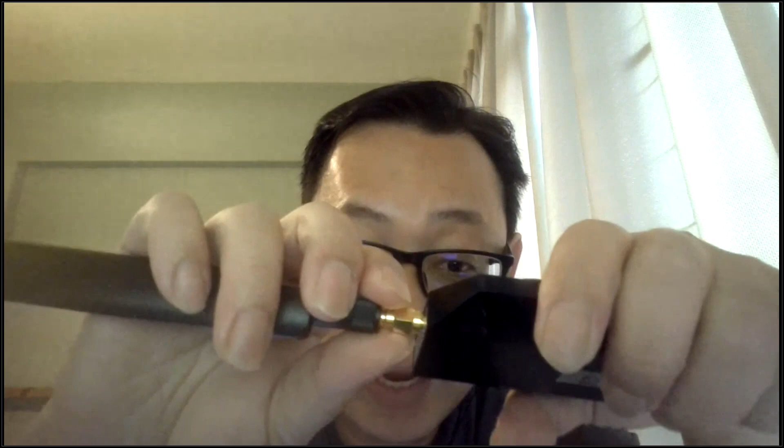This is the external antenna that comes with it. This connection is an SMA connection, so in case you have any other antenna that you prefer, also with SMA connectors, you can use your own preferred antenna and connect to the Epiq scanner to do the scanning.

From here you can see this is the USB, the Type-C USB connection. You can connect this with the tablet running the iBwave mobile software app via this USB cable. This scanner is actually powered on using this USB cable as well, and of course, this cable must allow data connection transfer so it can do the power up and data transfer at the same time.

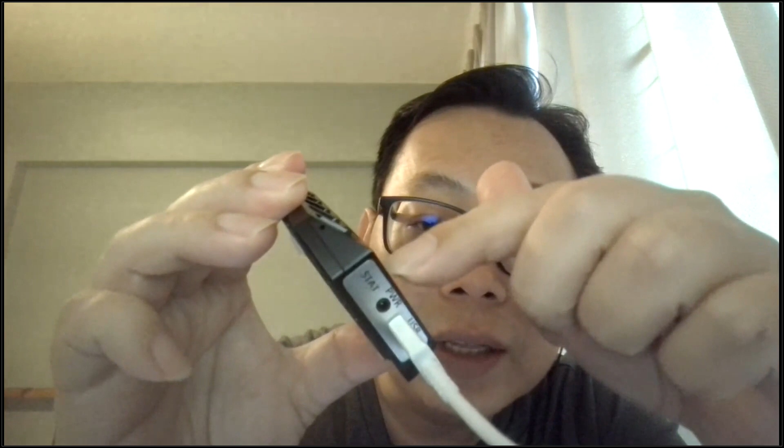So after it's powered on, you will see there's a blinking light, which means the hardware is ready to go and use.

So after this, I will move toward the demo, the live demo session.

So in order to connect to the Epiq scanner, we need to open or launch the internet browser. In the internet browser, you can use Chrome or Edge, and then type in this IP address to access the user interface for the Epiq PRiSM Scanner.

Just for your information, while connecting to this Epiq scanner, the tablet or mobile device must be in the so-called airplane mode. This is to allow the full feature Epiq scanner to fully capture the RF signal scanning.

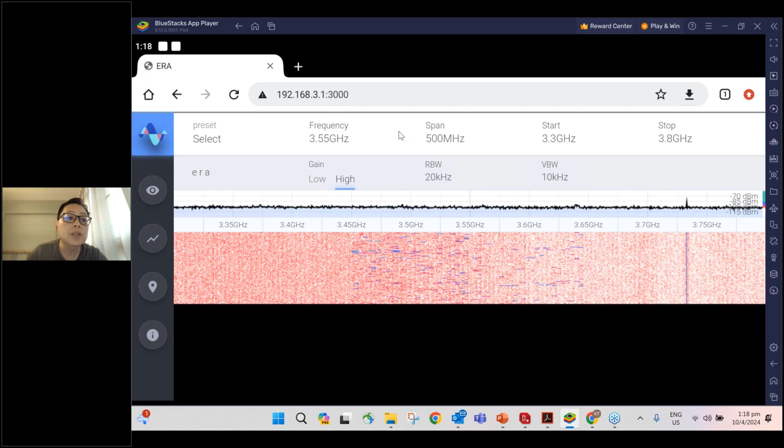So first, we go to the spectrum analyzer feature. From the screen you see right now, this is the spectrum analyzer, and you will see there are four main features for the spectrum analyzer.

You can change the resolution bandwidth, or you want to change the video bandwidth - you can just click on it. For example, I just want to narrow down the VBW, so it will help you smooth out the noise variation on the trace.

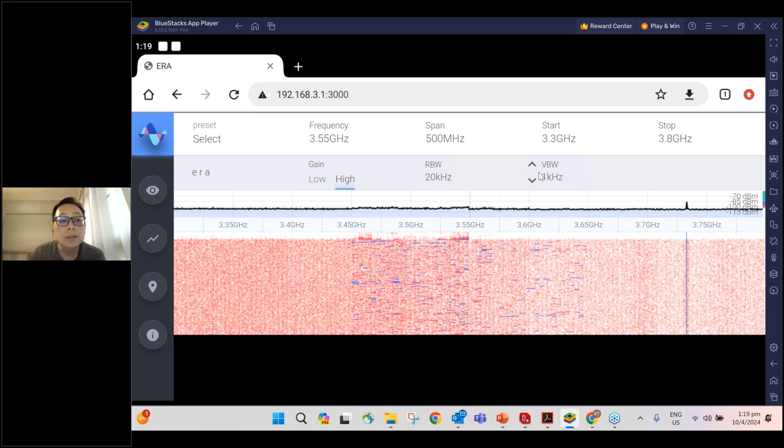So when you see this, there's a button on the left hand side. The reference signal we currently refer to is -70. If you want to change it, you can change accordingly. For example, -75, it will display on the screen.

On the right hand side, the separation for each division is 15 dB. This refers to the dB per division. If you want more narrow separation, you can change it here.

The second thing will be the trace in the spectrum analyzer. It's important to identify the minimum trace and the maximum trace. You can enable either minimum or maximum, or enable both. For the maximum trace, you turn it on to trace the strongest signals, or you use the minimum trace to check if there is any constant signal hidden within the bursty signals. I'll just leave it as is for demo purposes.

Here is a marker, so the user can double click on this spike. It will show you the frequency and the power in between, and you can add it as a marker, which will save in this marker session. All these features help the user scan the surroundings and identify any potential interference. Lastly, there's an interface here you can click to go to the PCI scanner.

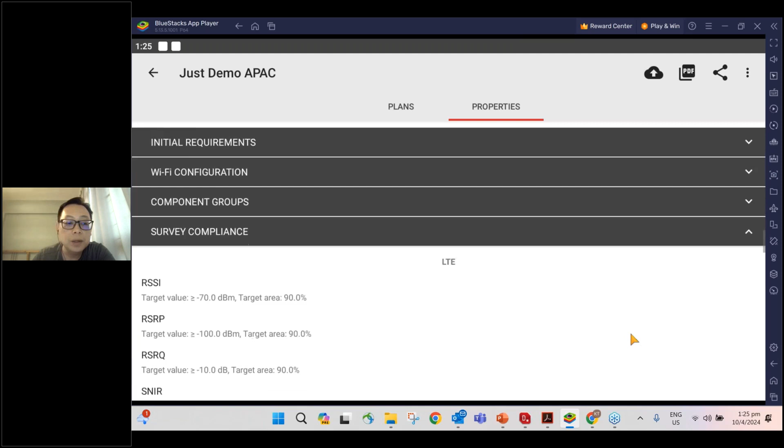So here is LTE. You also can set what are the target values that you want to change. So you can change, okay, I want for this, I want to achieve minus 90, 95% of the area. So you can always change the KPI for the project.

So we go back to the plan. Plan is actually the floor plan that we refer to. This is the term referred in iBwave.

You can also use this plus button here to import your outdoor map or the indoor map. If you have an outdoor map pre-saved in your device, you can choose from the folders. If not, you can straight away turn on the Bing Map feature to capture from the Bing Map.

And for the indoor floor plan, it's the same. For select picture, that means you have a pre-saved floor plan, so you can select it from the folder you saved in the device.

Or in some cases you do not have the floor plan, so you go to the site. For example, in a shopping mall, you can always go to the shopping mall directory or the fire exit staircase, where usually they will have the photos. So you can use this take photo feature to turn on your camera and take a photo to use as a floor plan.

In the worst case, if you go to a very old building that doesn't have such things, you can use our built-in create plan tool to draw your own floor plan.

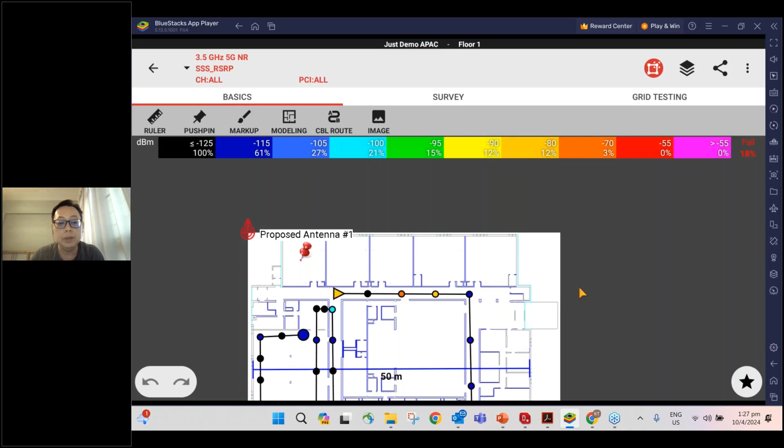All right, let me go back and double check the scanning. I will stop here for a while. Go back — so it's still scanning, but that's okay. We have some information that we can reuse for the demo.

In the iBwave mobile survey app, there are three main features. The first one, the basic, is actually the site survey feature built for the user to take notes on all the information they record during the site survey.

They can survey the cable routing or the proposed antenna location using a push pin placed where they think an antenna can be installed. After pressing the push pin, the user can record using the camera, take a picture or take a video to see the location, and also add remarks, like, okay, this is a proposed panel antenna location.

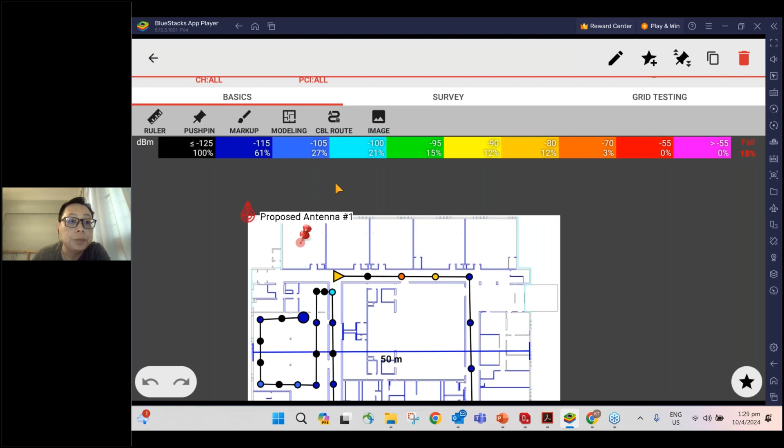Of course, you also can do some modeling. In case the floor plan is not updated, you can update it by drawing the wall or the corridors.

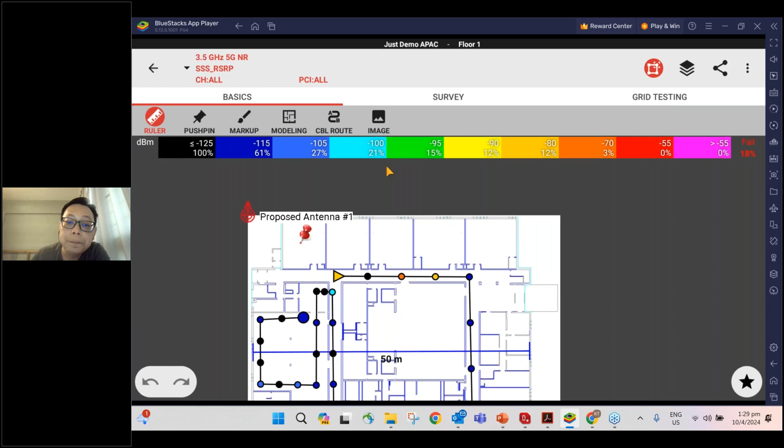The ruler is the one you can use when you go to site, if you want to measure the actual distance. The third one, grid testing, is mainly built for P25. I will not go through the detail here because we are unable to demo it. If you need any P25 demo, a private demo, please kindly contact us and we will arrange accordingly.

So the most important here is the mobile survey features — these are the features that we link with our Epiq scanner. These are the samples that I did for 5G.

So you can see this — these are the samples, let me see — okay, floor 1 and floor 2. These are the samples that I collected for 5G. You can see this is a 3.5 gigahertz 5G NR walk test that I collected.

When we create a new site, the walk test, you can choose either 5G, LTE, or P25 — you can do both simultaneously together in one walk. For LTE, for example, we want to test 1800 just now.

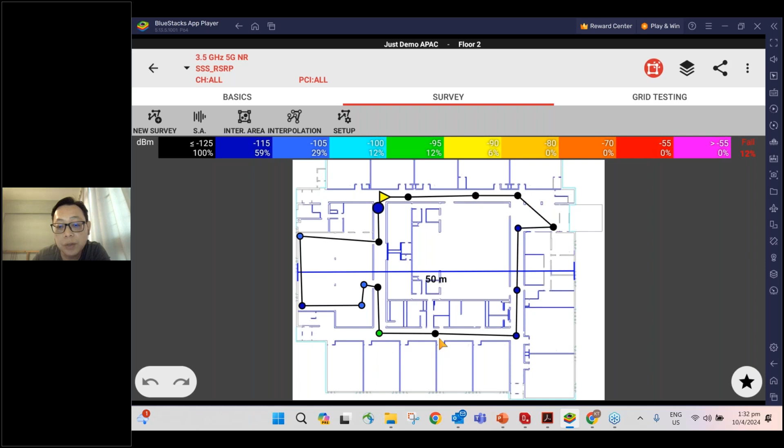So here are the samples of stop-and-go. You can see it's starting from this triangle point. When I walk to the next point, I just place a marker. When I walk continuously, unevenly, I place another marker, and so on — you can see that the points in between are not distributed evenly.

So this is the example of stop-and-go, and this is the sample of 5G 3.5 gigahertz using continuous mode — you can see in between they are divided at an evenly distant interval.

So it saves us a lot of time to reduce, to keep looking at the floor plan.

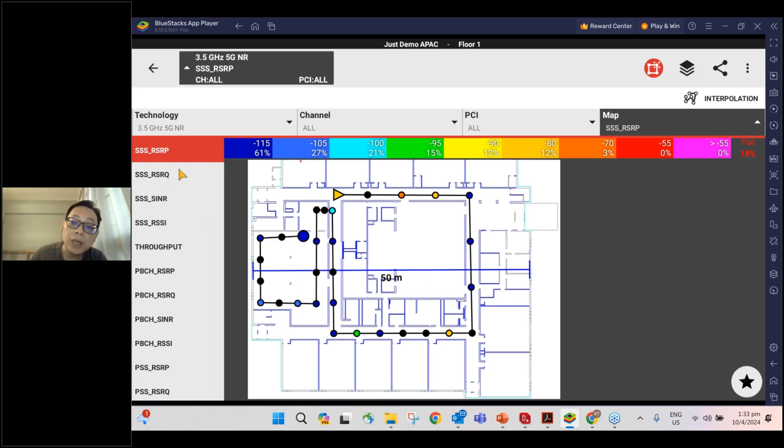Okay, so when you click on here, for 3.5G you can see what channels we scan. You can scan multiple channels at the same time, and the PCI we capture. Then the output map, the KPI we can capture for 5G currently is only the SS RSRP, RSRQ, SINR, and RSSI.

You can also turn on this interpolation, so instantly it will show you the interpolation output map as well. From here you can see the color legend, and of course you also can select the individual channels to see what channels serve or are dominant in the area separately.

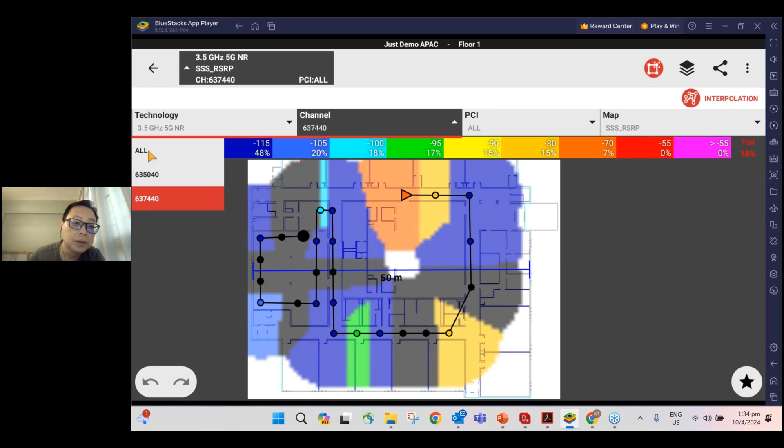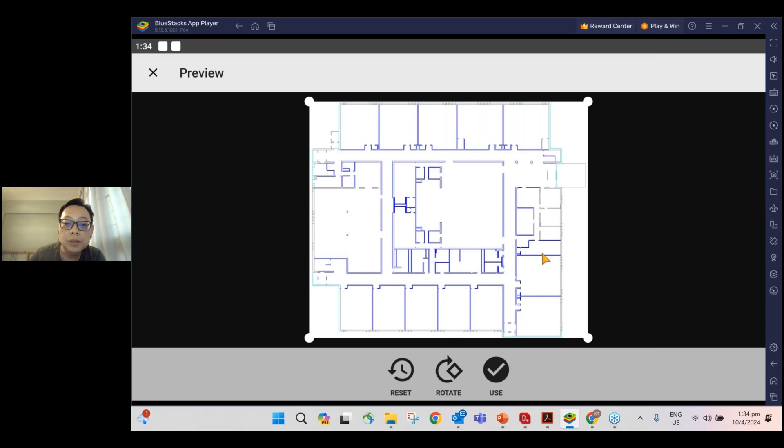I'll do a quick demo of how to import the floor plan. You can preload it, use it, and select your scale. For example, end to end is 50 meters. After this, you can use the push pin to note down all the information.

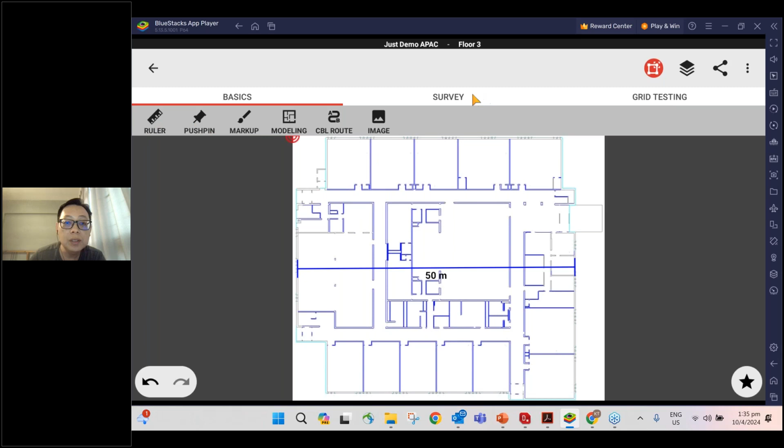Okay, so I'm using the continuous mode, and please bear in mind that here you need to do the Epiq scanner. We just click start.

So we're back to this floor plan. We just assume that we are standing at this point on the floor plan. Then we just put the first marker, place it on the floor plan to start the collection. Please bear in mind, for the first marker we place, it actually takes a bit longer time because we need to initiate the device and align it with our iBwave Epiq scanner as well.

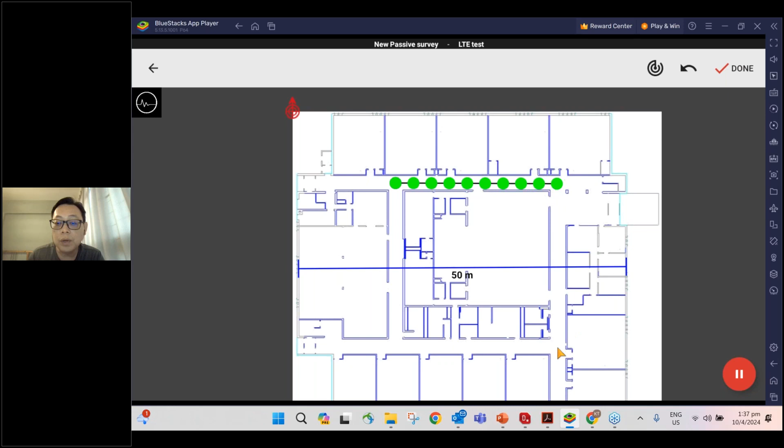So once we place the first one, we continue to walk along the corridor. When we reach the end of this corridor, we just click here, and you will see that it will automatically distribute all the points in between. So we continue to walk, and it will continue to separate and distribute evenly on the floor plan.

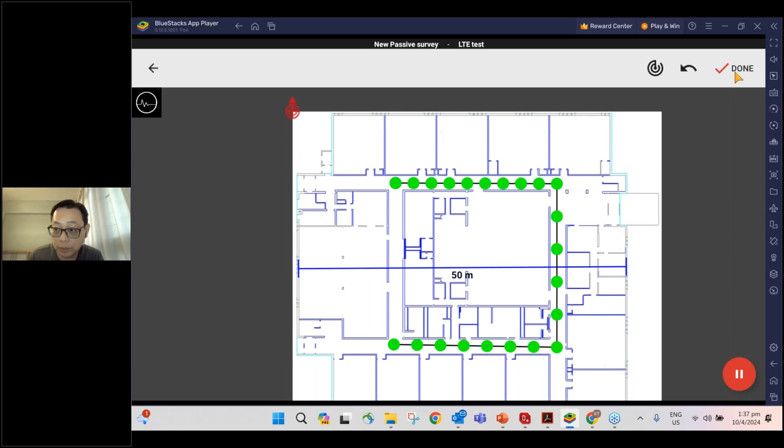So of course, in the actual one, you need to walk, right? So for example, if we're done with our collection, we just click done and save it. Just click OK.

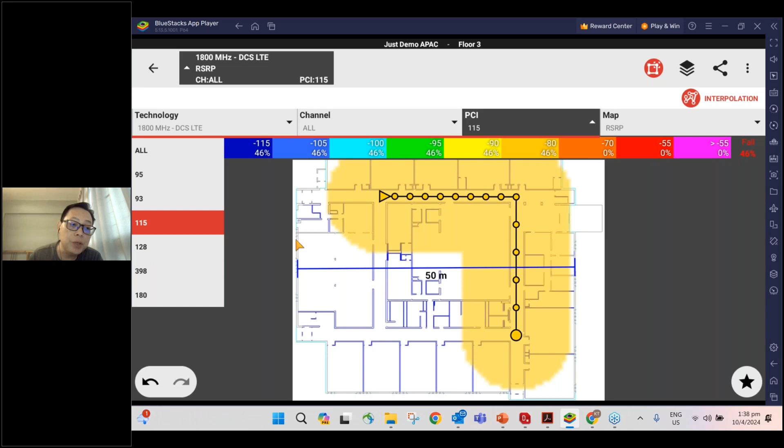So immediately it will interpolate. And here you will see this is the 1800s, the channels we scan: 1444, 1600, and 1300. You can select individually to show where they are, or you want to see the overview, and also the PCI that's captured, so we'll see which PCI or which cell is dominant in the area.

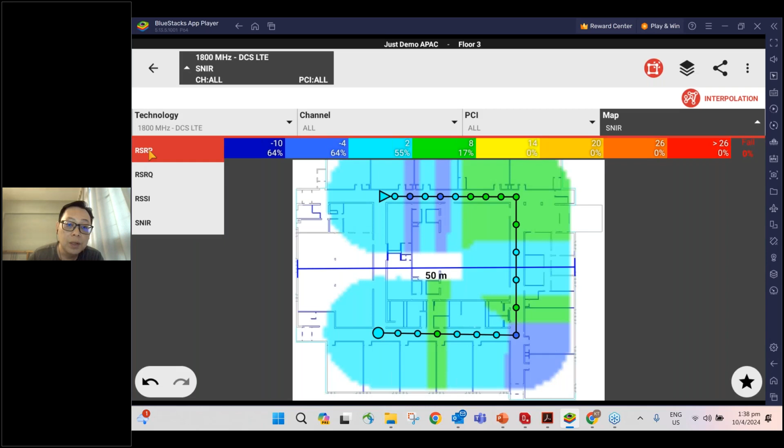So here you can also toggle the output map: RSRP, RSRQ, RSSI, SNIR. Besides that, you also can click on the point, double click on the point, and they will give you the details, the information that we collected. So we can see the PCI, RSSI, RSRP, RSRQ, SNIR, and then the channels, uplink, downlink, and also the neighbors.

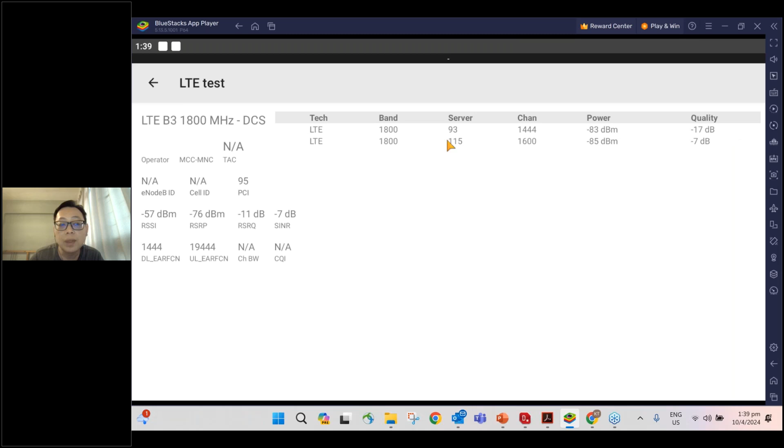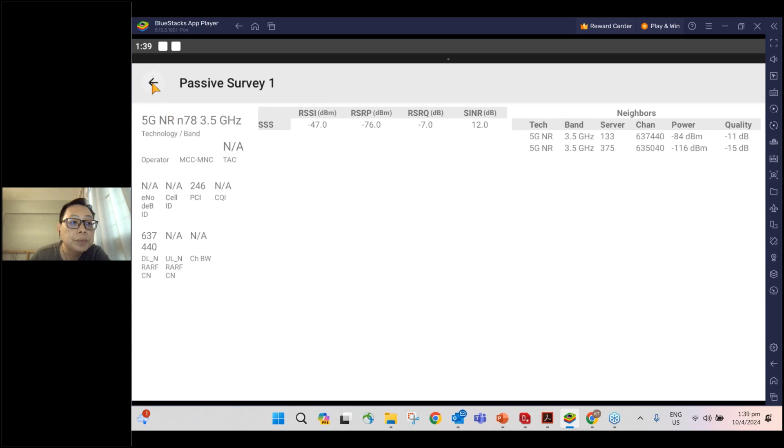So I think we went to the 5G just now. I didn't show you the 5G KPI, so just click on the 5G. What you can see in 5G's KPI: the RSSI, SS-RSRP, RSRQ, SNIR, the neighbor, and also the PCI, the channels, uplink, downlink. So all these will be embedded in this iBwave mobile app or the collection.

Another feature that I would like to show you is, okay, you can see the cloud here. You can actually share this survey file to the cloud, iBwave Unity or iBwave Design platform, so the designer can download it from the cloud in the office. And also you can share it via email, share the project via email.

And then the third one will be the PDF. So you can also instantly, on the site, generate the report: the title page, the floor plan, the annotation, the push pin annotation, and also the survey map. Inside the configuration, you can see this map, and choose which one you want to export out.

So you can export out both of them, the output map that you want to export. Export all of them. Okay, just click run. So just a demo. So you save it.

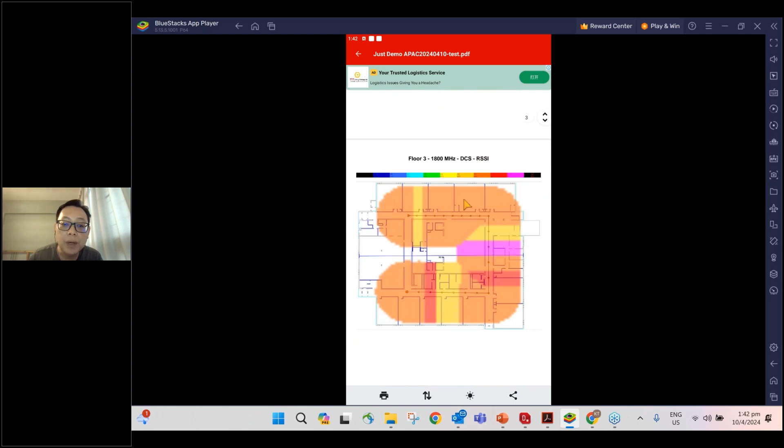So you can instantly open it with the PDF viewer. You can see that if you have keyed in all the information for the property, it will populate the information, the address, the client's information, and the floor plan.

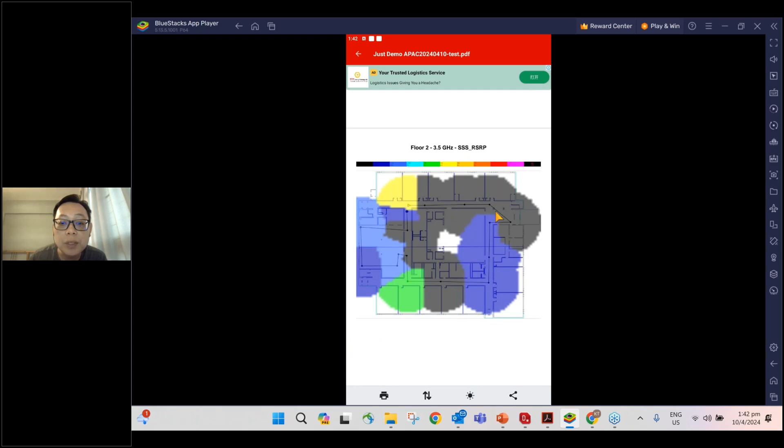Floor 1, remember we have this push pin, so it will also display where this proposed antenna location is. On the spot, you can present this to the building owner and get his approval to install.

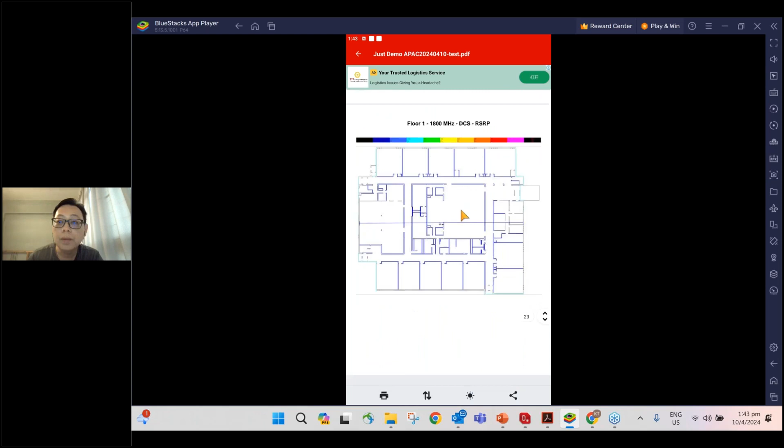This concludes my live demo now. I will turn it off and go back to the presentation slide.